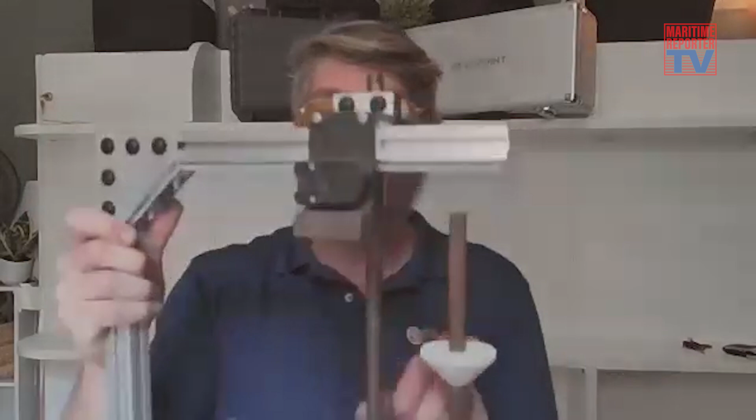You've already given a short overview of TrueProp - can you give an overview of its offering to the maritime market? Yeah, absolutely. When we initially launched, our primary focus was existing propeller inspection equipment. Typically, I actually got a little model one right here - I'll grab it off the shelf. Typically that's a drop rod based system. So the propeller mounts here, you've got an axis here that measures the radius, and then you've got another axis that measures the drop. When the propeller sits on this and turns, we're measuring the angle.

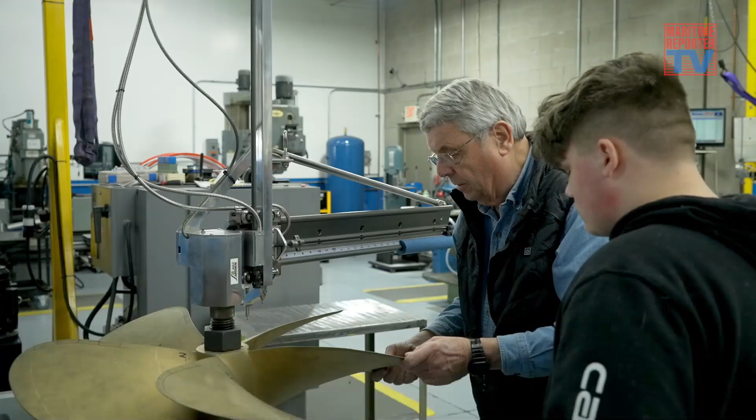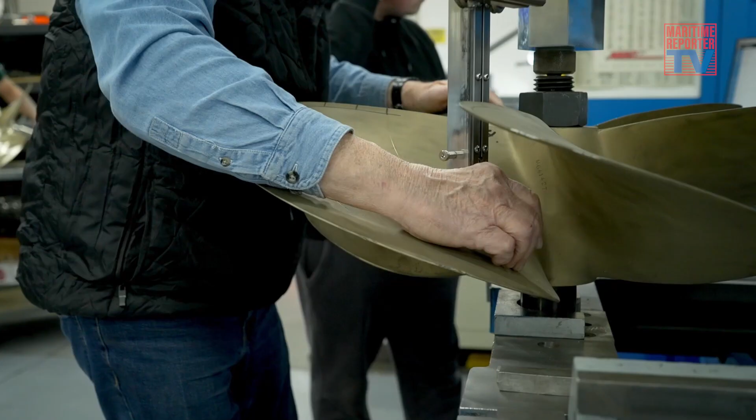So we can pull any coordinate off the blade surface. That's the equipment we traditionally worked with. We looked at the sensors in their equipment, figured out how to get those signals into the computer, and set up the software for them. That was the main product - the software piece, and also the interface that goes in between it.

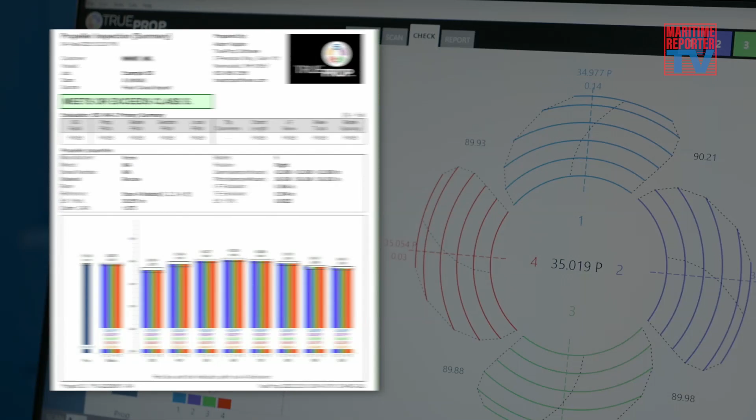Out in the wild, there are a number of commercial machines that go back to 1920, 1930. Some of them are really, really old, and a lot of them don't even have any digital equipment on them. So the primary product is software, and then we got into retrofitting these older machines, both with the software piece and the digital connection - the sensors you need to detect position.

From there, we were actually working with Gary Linden to sell new machines as well. Gary has this hydraulic prop press system. It's great - it's got an integrated scanner that goes on the top. You can check the propeller, and if something is not in tolerance, you can go and make adjustments hydraulically. So basically, we're getting into more and more propeller repair equipment.

In 2017, we launched what we call TrueProp Virtual. This was for people who had 3D scanners, and our first customer was really a consultant working for the Coast Guard. What he had was a Creaform HandyScan Black Elite, a really top-tier handheld 3D scanner with blue light laser. He would go into the dry dock and scan their propeller where it's at, get the 3D model, and then we would go and pull data out of it.

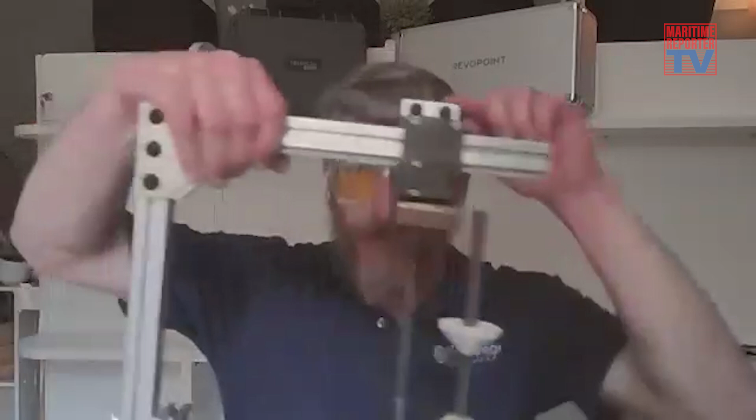So we just automated that process using TrueProp - instead of pulling data from physical sensors on a drop, a radial, what we call a pitchometer, which is basically a coordinate measuring machine, just a polar system - instead of physically probing the prop, we started to 3D scan it. You bring it back to the office, load it up in the software, get your report and all your diagnostic screens, and you can understand right there where the propeller's damaged.

This was, again, originally developed for kind of one customer, the Coast Guard. It was a joint industry project with a couple of companies who were interested, and out of that came our TrueProp Virtual product. So this was great - people who had 3D scanners could bring their propellers into TrueProp, get reports, and understand things.

But we were getting consistently asked for a whole package - people saying, hey, I don't have any 3D scanner or computer or anything, I need everything, I need the software, I need the scanner, all that. When you get into blue light 3D scanners, there's a hundred options, starting from $500 up to $200,000 or $300,000 for these systems, depending on capabilities, speed, all that stuff.

Through a lot of trial and error, we narrowed down on a product that was really perfect for marine propellers. Our criteria was that we needed a certain level of surface accuracy, but the biggest thing was: can you do this outdoors? Can you do it in sunlight? Can you do it in a dry dock environment? Because there are huge advantages to being able to go into a dry dock and inspect the propeller.

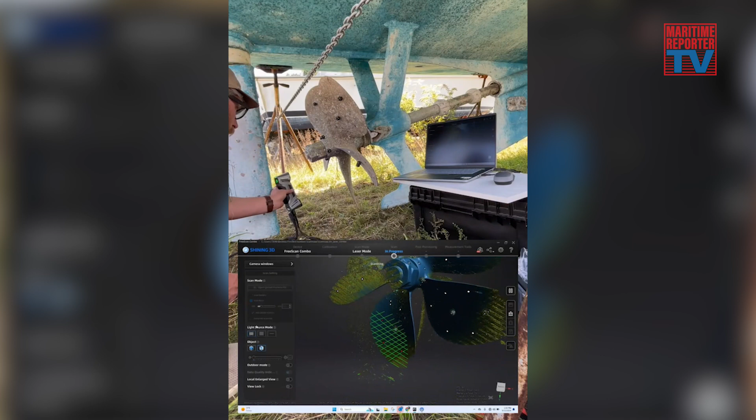So we found Shining 3D, which offers some scanners that are really very capable at a great price point for our market, for our target customers. It's a very scalable solution. We have an entry-level model called the HX2 that we offer with our bundle - great for propellers up to 80 inches. People use it for outboard propellers, people use it for larger propellers - I've seen people do a 120-inch propeller down in Panama.

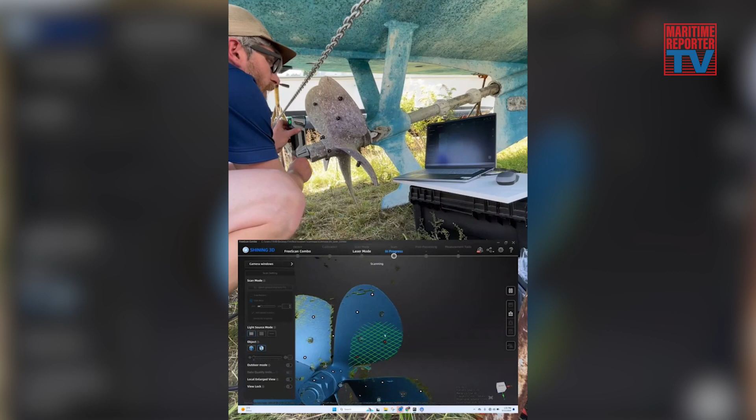So that one is the entry-level one, but it's still very capable. If you're doing this all the time, you need more speed, you need basically a bigger capture area. So that's when we got to the FreeScan Combo - TrueProp Virtual plus the FreeScan Combo, which is this scanner right here.

You can actually see just how portable this system is, right? It's just a small briefcase. I can take this as a carry-on on the airplane, fly down to the dry dock, go right there. I've got my equipment, and really at that point, all I need is a high lift or some scaffolding or something to access the prop.

The real difference between those two is really about how fast you can capture it, because the scanner has more laser lines and a wider field of view, can just capture more. Think about how long it would take you to paint a surface with a roller. If you have a small roller, it takes a long time. You got a big roller, less time.

So now today, we are working on offering our third package, which is going to be essentially an even wider field of view.

The customers that we're selling this to are typically boat builders or shipyards. One of them is scanning 35-foot boats, wants to do tuna towers and cabin layouts, wants to check shaft alignment, and also wants to do propellers.

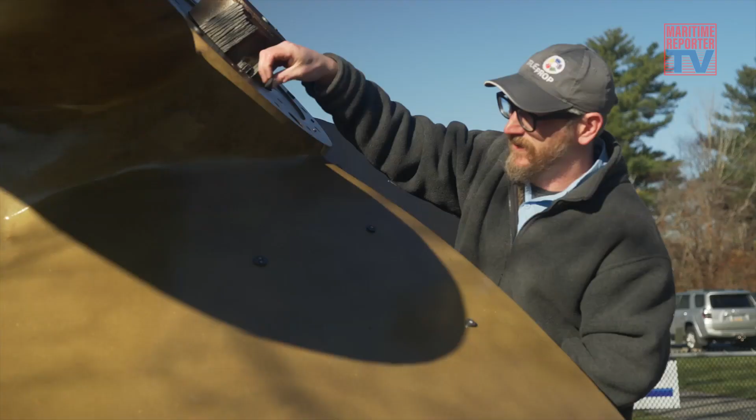And it was our largest scan that we did personally. Now our customers have done larger ones, but this was one we did personally. In Portsmouth here, where I live, there's an old submarine called the Albacore. It's like the first teardrop hydrodynamic sub design from the 1940s, and it was heavily used in the 50s and 60s as the Navy's premier test bed.

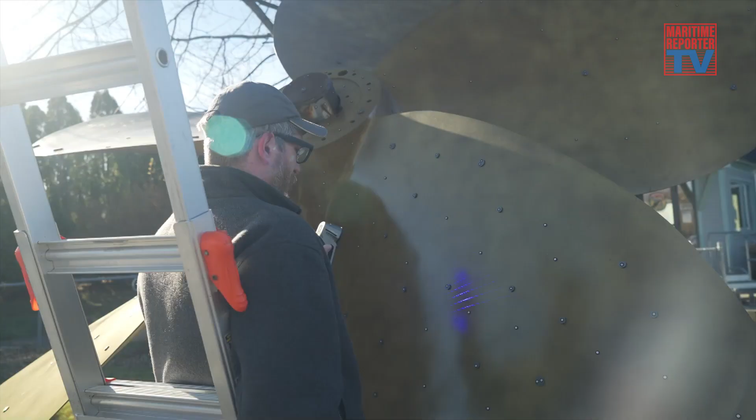It's a propeller driven submarine. I believe it was nuclear powered, though it might have been diesel. Either way, it had a set of contra rotating propellers, and it was actually originally deployed with just a single prop. So they were retrofitting this thing in different ways, testing it out.

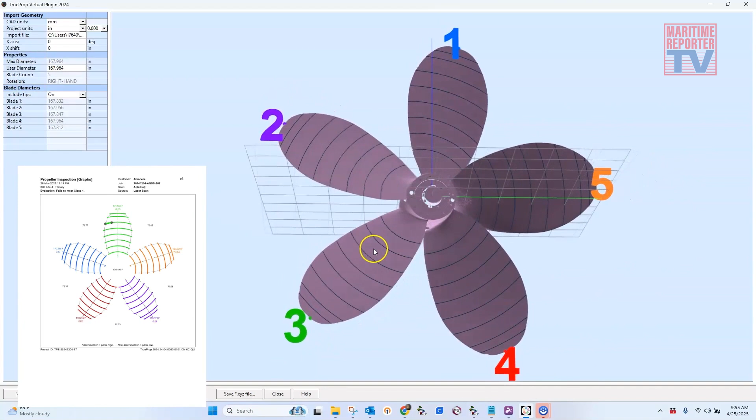Very successful program—now a lot of the other, the Virginia class and stuff, all use this teardrop design, these flanking rudders and things like that. They've largely switched from the propeller style to a water jet style system. But anyway, there's a museum in town here.

They've got the submarine on display—you can walk inside it. Really cool local attraction. So we got in touch with them and said, hey, we want to scan these propellers as kind of a case study.

It's interesting because it's an old 1960s Navy design. It came out of Philadelphia, and it was used for a couple years on one boat, then it was put on the Albacore, and now it's mounted in the park there as kind of a memorial.

So we 3D scanned that thing. It's 15 feet in diameter, very big. We just had to use a ladder, so we showed up with laptop, ladder, 3D scanner. Like 2 hours, we were done—scanning everything in direct sunlight, all the conditions you'd expect to make this very realistic and difficult. And of course, we were very successful, because that's how the package is designed.

It was really interesting because when we were looking at the prop, we could see like a bend in one of the blades right on the edge, like a little scallop. And 3D scanning it, we thought, oh, that area is going to show up on the report. Sure enough, the propeller's perfect, and then right there, there's an area where the blade was bent—shows right up out of tolerance.

My guess is that when they were transporting this thing and rigging it and mounting it, when they lifted it up, it probably leaned down on that blade, and the 3,000 pounds of bronze just bent the blade. So that's just a really cool case study.